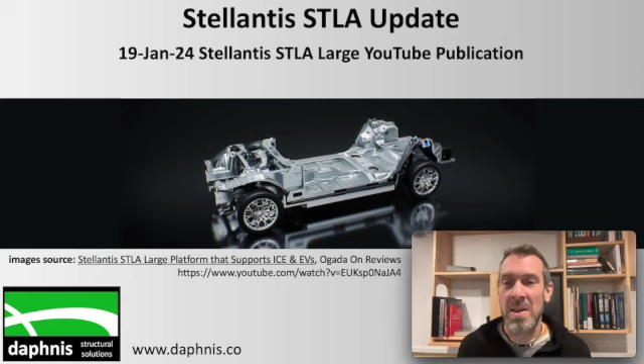So why do I think Stellantis architecture is really interesting? They are nearly opposite in their strategic approach as Tesla is. And a lot of traditional OEMs are doing the same thing, but Stellantis is really out on the edge of this architectural strategy. So what I mean by that, well, let's look at a couple things.

The cost strategy. Tesla seems to have an unlimited amount of money that they can throw at manufacturing tooling and the manufacturing process and building new plants. And they're doing this to minimize the product price. And, you know, the large castings is a good example. They spent a lot of capital to execute that in order to, what they're thinking, save some piece

price in the product. Whereas Stellantis and a lot of traditional OEMs are looking at more of a balanced or minimized investment cost strategy. They're trying not to spend so much money on the manufacturing process and the tooling, and they're willing to incur some level of product price scar in the product that they sell.

Now, on the architectural variant strategy, so how many different vehicles are you building off of this platform? Tesla has a very narrow variant bandwidth strategy that they're executing. As the bandwidth gets wider, you traditionally incur more scar on the product in terms of price and mass. So Tesla is so focused on minimizing the piece price of the product that they have a narrow variant bandwidth

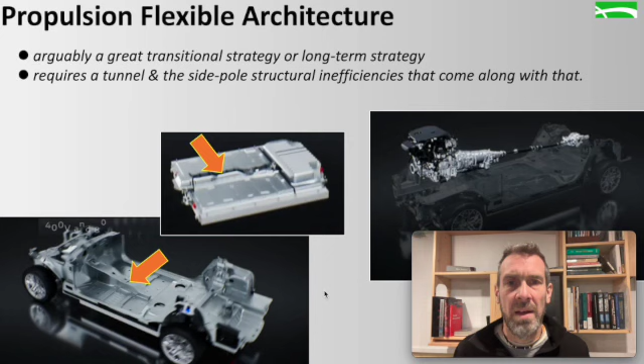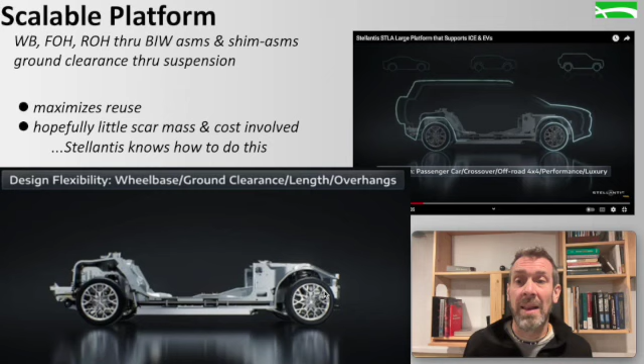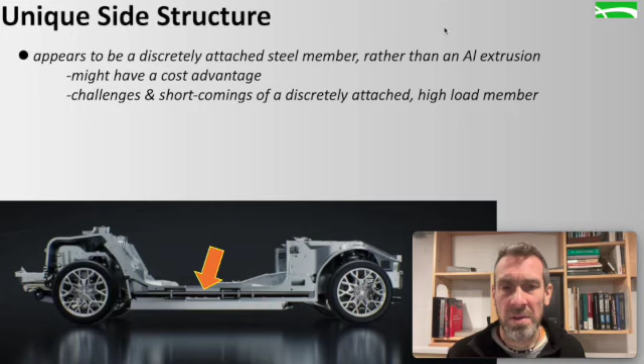I played around with this engineering solution in the past, and certainly there is a challenge with respect to distributing force in a member that's discretely attached. So this will be interesting for sure. See how this works out for them. It's very likely a cost advantage over an aluminum extrusion, but the details are going to fall out, and I'd love to see how this works in crash.

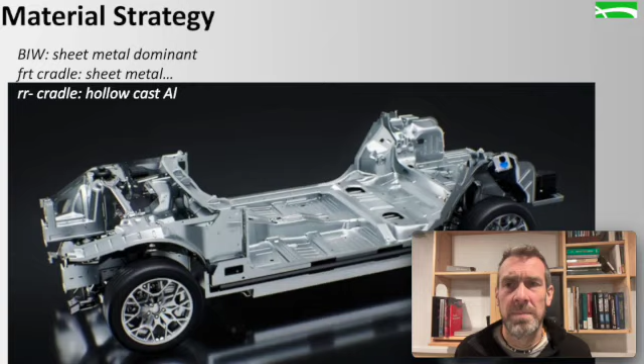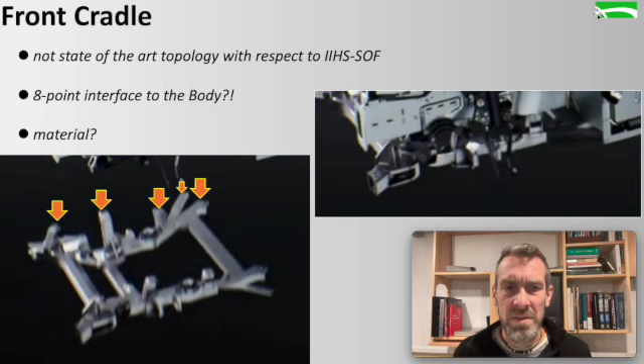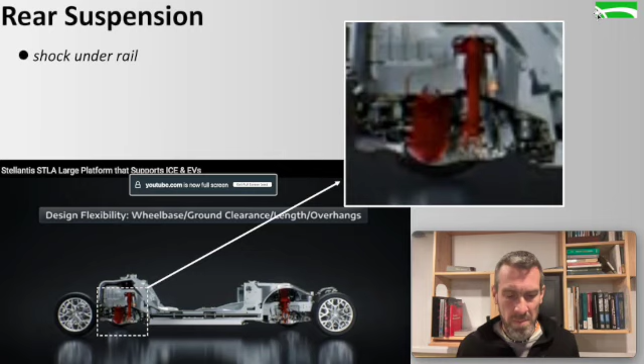So digging deep into the takeaways, I found it interesting that Stellantis talked about driveline flex, and we're talking about front-wheel drive, rear-wheel drive, and all-wheel drive. In the BEV world, I don't know that I've seen a product that offers all three. Usually it's front and all-wheel drive or rear and all-wheel drive, but not front and rear. I suspect that the gas variants are going to help create this bandwidth. But certainly, if they're doing all three, it's a lot of pain. You got to ask yourself why in a BEV. But if they do, I think it will be unique, and we'll see if it has any advantage to them in the marketplace.

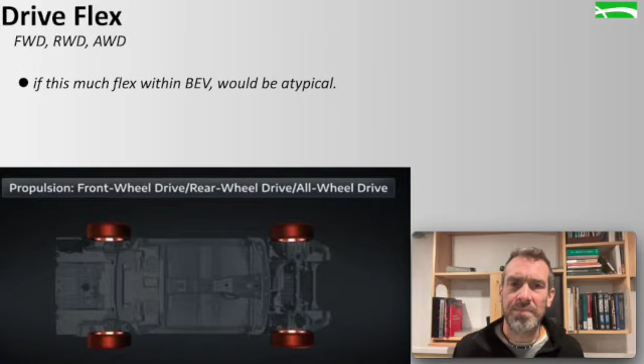So yeah, and that's it. I almost feel like I need to give this thing a mark score or a tug score. I think this strategy is fascinating in terms of the flexibility and the bandwidth that they're capturing. I'm really interested to see how that translates into financial success and sales success. I love it. In terms of structural engineering execution, I think they've got a little bit of opportunity to improve efficiency in this design. I'd be really surprised if this is as light and inexpensive as some of the competitors and certainly the Tesla products. So there you go. That's my 2 cents on what little we know about this right now.